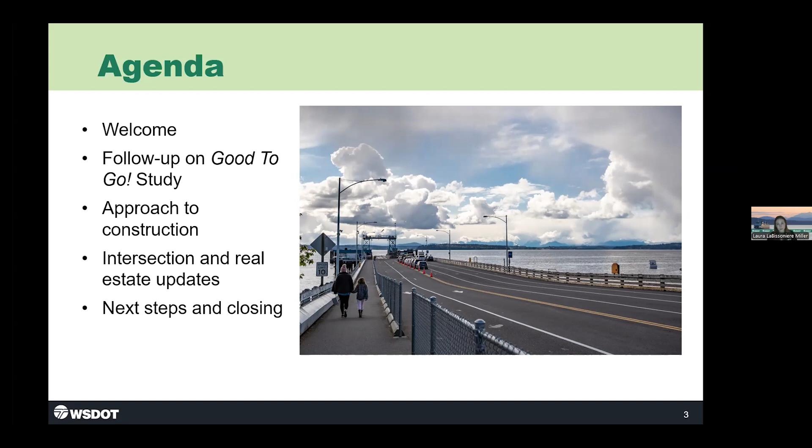I will go ahead and just cover our agenda slide here. So we have just a quick follow-up on the Good to Go study. We're going to spend most of our time today talking about the approach to construction, and then we'll hear some updates on what's going on with the intersection and real estate.

With that, I will turn it back over to Hadley to cover our timeline. Okay, thanks, Laura. So many of you have seen this timeline before, but just as a reminder, we're nearing the end of the PEL Planning and Environmental Linkages study phase of this project that's been going on since 2021.

We're going to be doing the level 3 screening in the next month to screen the range of alternatives that we have. And then we'll be writing the PEL study report and sending that to FHWA for their approval in early 2025. So we're kind of nearing the end of this phase that you've all been working with us on for the last several years, with the goal of narrowing the range of alternatives to a single alternative to carry forward into the NEPA-SEPA review.

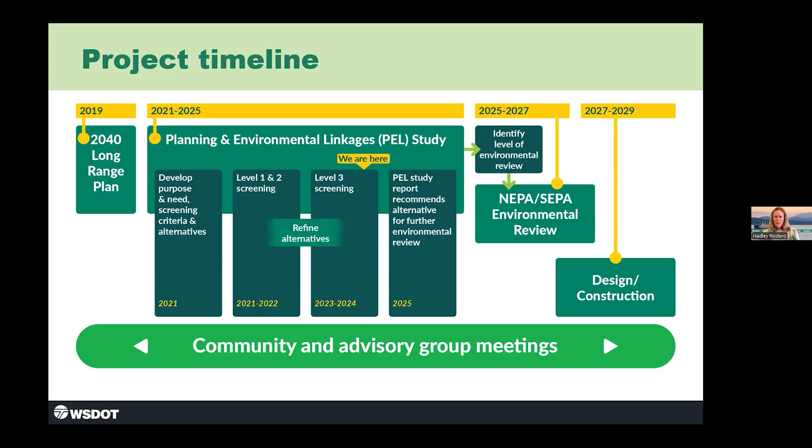So the next slide shows kind of where we've been in this process. We started with a very wide range of alternatives during level 1 screening. Basically everything was on the table, including moving the terminal to a different location outside of West Seattle. Then we narrowed the range further to different dock sizes, till we came up with 2 basic concepts, which was a larger dock or a dock that is similar or the same size as the dock that's there today. All of those concepts hold 186 cars, either a combination of on-dock holding or holding queuing up along Fauntleroy Way Southwest as it does today.

And the 186 cars is important because it's a vessel and a half, which is what our terminal design manual says, to be able to fill a 124 car ferry, which is the size of the ferry that operates this route.

So now we have these alternatives that we're going to do a finer level of screening on with more specific factors to narrow down the alternatives we have to a single alternative to advance.

This shows the topics we've all discussed with both the technical advisory group, all of you, and the community advisory group, which is a group of 24 members of the public and community representing all 3 Triangle Route communities. We're at the point where we've been sharing over the last several months information about some of the key factors that will go into selecting an alternative.

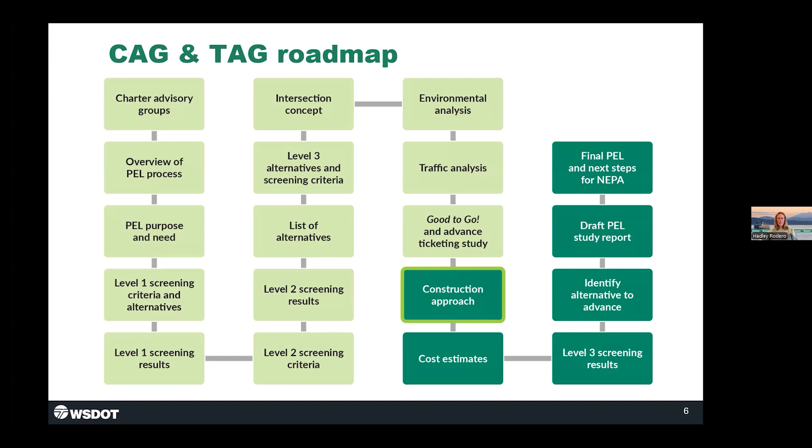And then we'll be moving into drafting the PEL study report and getting input from all of you on that final PEL study before we move into the next phase of design and environmental review. So with that, are there any questions on the process or where we're at with the project? Okay, back to you, Laura.

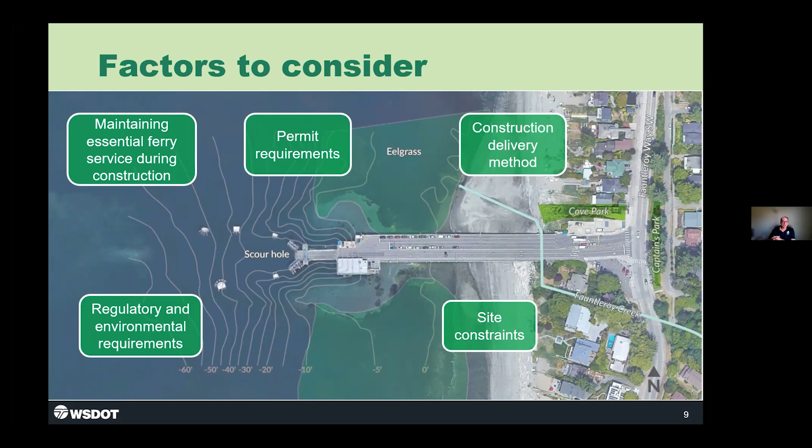We do understand that it's disruptive. Construction is never easy, whether you're remodeling a kitchen or bathroom in your house, or reconstructing a ferry terminal—it is very disruptive. There's a lot that goes on, and we're going to do the best we can to plan and minimize the impacts on the neighbors and all of the ferry riders, so that there are really no surprises. That effort is underway now and will continue through the NEPA-SEPA process.

On the next slide, I want to talk a little bit about the screening criteria we're using to evaluate the alternatives. The next step of this planning process is really to dive into the screening, and our goal is to develop an alternative that we want to take into the NEPA process by the end of the year.

A couple of things I want to highlight here on the criteria: one is the ability to avoid changes to the park and recreation areas. This includes both the Cove Park adjacent to the terminal, as well as Captain's Park, which is across the street from the dock.

We want to be in complete alignment with the project schedule. Each of the alternatives we've proposed involves a very extended multi-year construction season. It definitely is a factor in how we select an alternative. Ed will talk about that in a minute.

Project feasibility pertains to both temporary and permanent right-of-way we'll need to acquire, both onshore and over the water. That's very important for us to consider as we screen these alternatives. And finally, without an adequate amount of budget to build the project, we can't achieve all that we want. So project cost is an important piece for us to screen.

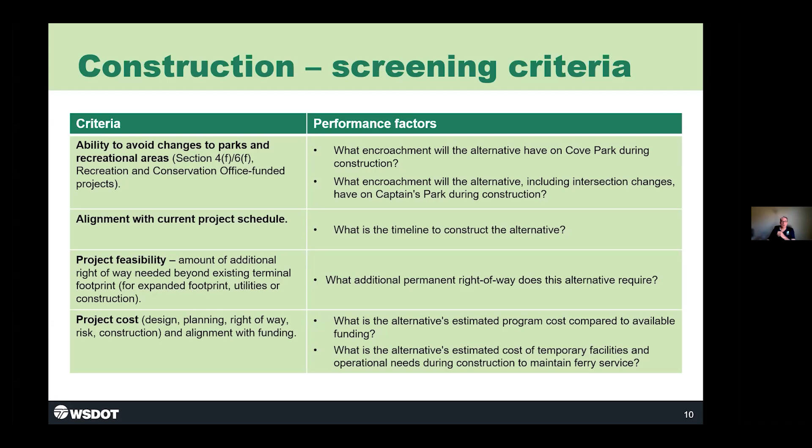We're going to talk about that in our next meeting when we meet with all of you. So let's go to the next slide.

One of the most important things the community's been telling us, and very important to our planning effort, is the level of service we can provide during construction. This is a very tight space in which to work. We have several lanes of holding and several lanes of egress on and off the boat. We don't have a lot of extra space, unlike Coleman Dock, for example, where we have 20 some lanes for holding. We have 4 lanes for holding, and it's very difficult to construct a project when we have such a limited amount of space.

We should plan for some impacts to customers, and that'll be part of this. We'll be communicating that throughout the design and then in construction to make sure folks understand what those impacts will be. That will affect the holding on the dock. It'll affect Fauntleroy Way for sure. So those are some things that we'll talk about here in a minute.

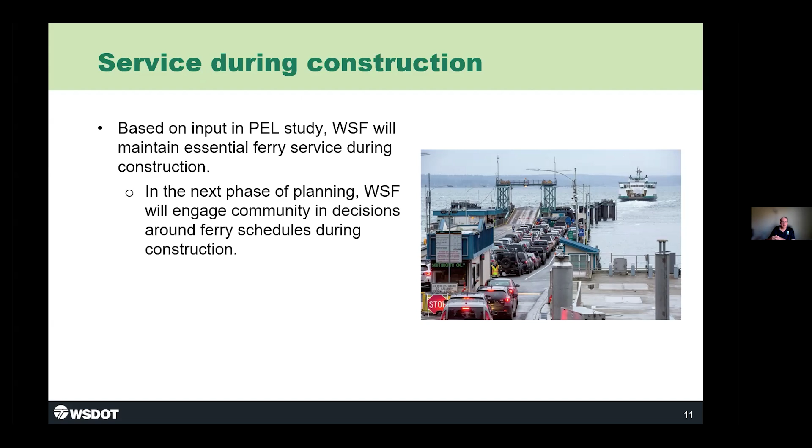With that, I'm going to turn it over to Edd Thomas, who is going to walk you through the sequencing of the various options and how we will actually replace the terminal, regardless of the alternative. There's a variety of ways to do this, but we're going to talk about that next. So Ed, you want to take it away?

Thanks, Dave. As Dave mentioned, as part of this study, we've started thinking about how to phase construction. We've developed a conceptual sequence, and with the next few slides, I'd like to explain each of these phases.

With phase 1, the ferry service operates from the south half of the existing trestle, utilizing the existing slip. That's indicated here in this dark cyan shading, with the construction activity highlighted as an orange hatching.

For the first 18 to 21 months, the contractor will build new toll booths, realign the exit lanes, and then build the north half of the new dock and a new temporary dock with a temporary slip off to the west-northwest off the end of the existing dock.

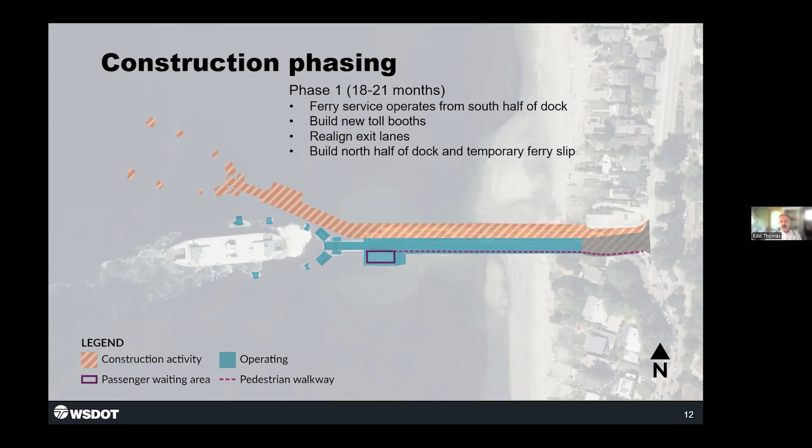I'd also like to note that we're still working on determining a suitable construction staging area for the contractor, as well as a suitable area for construction offices.

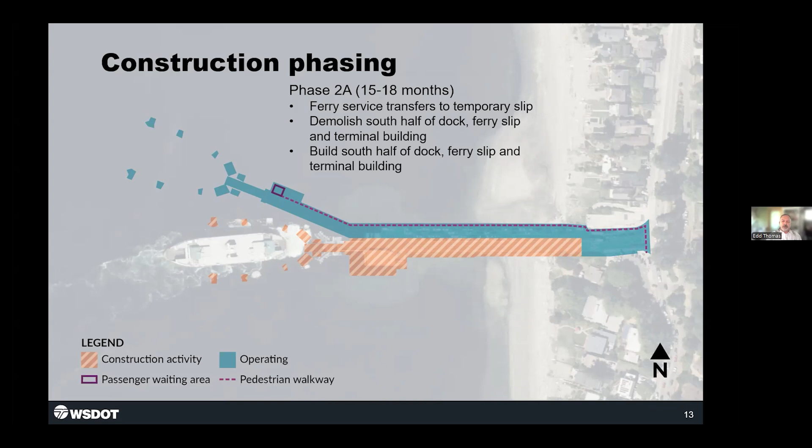Moving on to phase 2A, the ferry service will transfer back up to the north half of the new dock and operate out of the temporary slip. Over the next 15 to 18 months approximately, the contractor will demolish the remaining elements of the existing facility, the south half of the existing dock, the existing terminal building, and the existing slip, and then construct the new south half of dock, new terminal building, and new slip.

Moving on to the next phase, 2B, ferry service transfers back down to the south, operating off of the new south half of the dock and new slip. It'll be approximately about a month for the contractor to reconfigure the north half of the dock from its temporary configuration to its more permanent configuration.

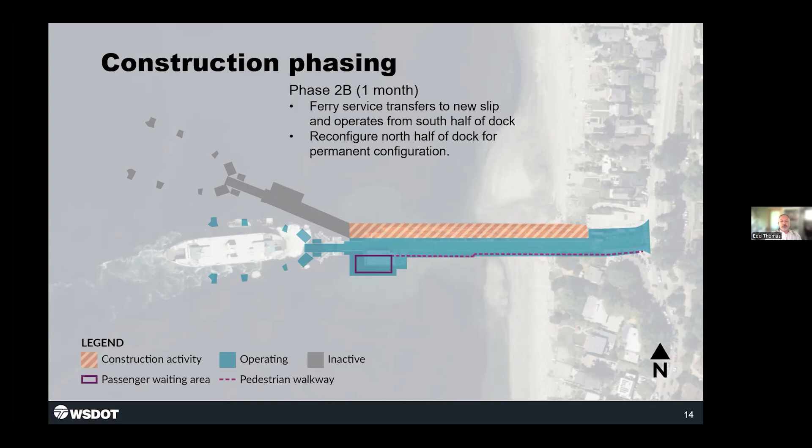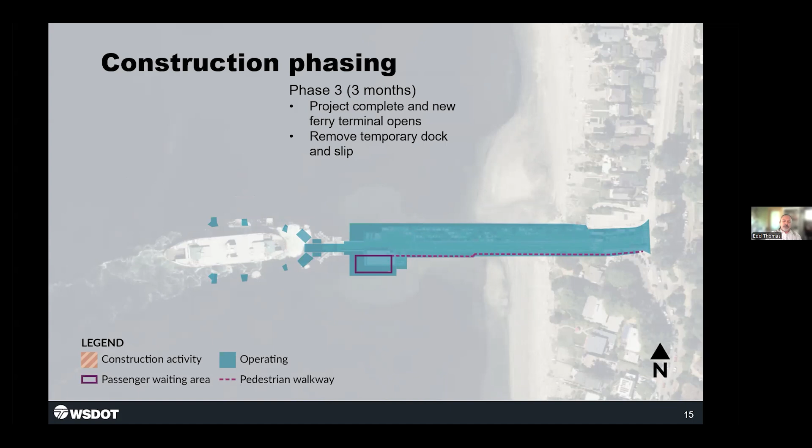Then at the end of 2B, we go into phase 3, in which the project is essentially complete and full service would resume out of the facility. Then over the next approximate 3 months, the contractor will remove all of the temporary dock and slip components.

Then with that, we'd like to open it up for questions about this sequencing. Thanks, Ed. I'll just pause to see if there's any questions about the construction sequence or anything that Dave covered.

This is Penny. I wanted to know if this construction sequence would mean you've chosen your alternative then? Or does this work with any alternative, I guess?

We have not chosen an alternative, and this construction sequencing would essentially apply to any alternative. The slides represent an approximation of the A series alternatives, and the longer alternatives would have a little bit more sequencing involved because of the nature of the longer dock.

Okay, I see Rod, Malcolm, I see you have your hand up as well. Would you like to jump in? Yes, especially since now I know my name is Rod instead of Andrew. I figured out how to change my name.

Two points. The construction sequencing slide was very helpful in assisting me understand the potential overwater coverage of the temporary feature, and that is something that most likely will impact the tribe's treaty right to fish in the area. And a knock-on effect of the temporary slip for the ferries is that the ferry is going to deviate from its existing route for a short distance. So it'd be helpful to the tribe to know close to the Fauntleroy terminal where the new route will be, and the route the ferry will have to take before it gets back onto its traditional route. Thank you. Ed, would you like to address that question?

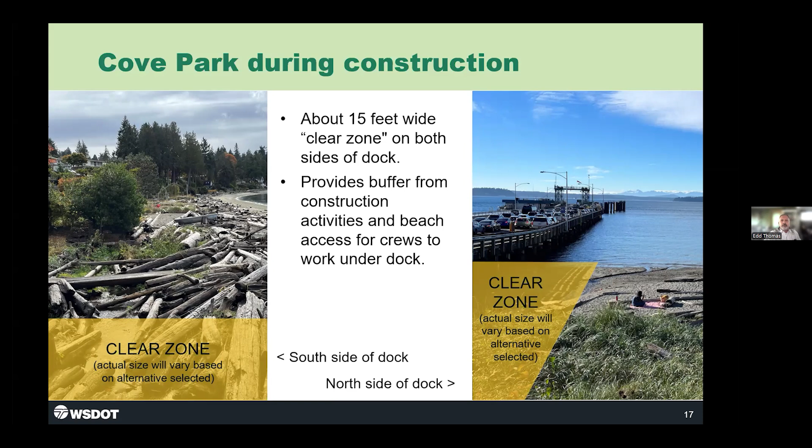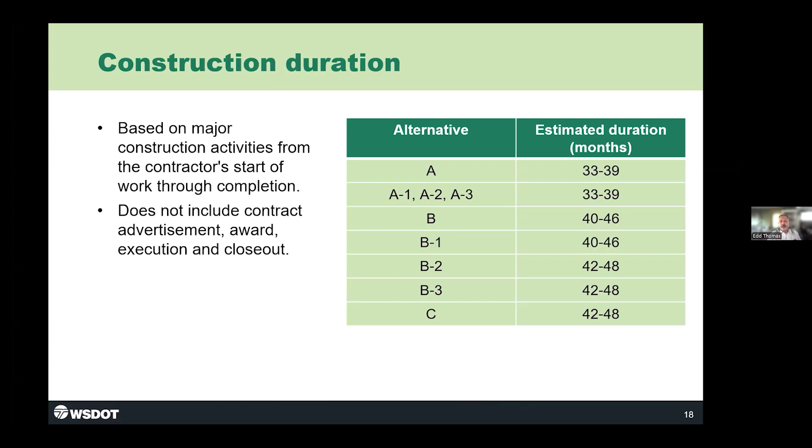These construction durations are based on major construction activities from the contractor's start of actual work through completion. These durations do not include internal construction contract requirements for WSF, including their advertising, award, and execution period, and their internal closeout period. And I think with that, I hand it back to Dave to talk about construction delivery method.

Okay, that's fine. One of the questions we've asked ourselves, which dovetails into the presentation Ed gave on phasing, is the construction delivery method. WSDOT has a long history of embracing alternative delivery methods and has done a lot of design-build projects as well as design-bid-build projects. We're diving into a delivery method called progressive design-build on our fish passage projects, and we recently finished the Coleman Dock project using a process called GCCM, or CMGC depending on where you're from.

So we went through a process to evaluate the delivery method and settled on the most appropriate approach being to use the design build method. There's a number of reasons for that. For those that don't know it, let me explain what design build is.

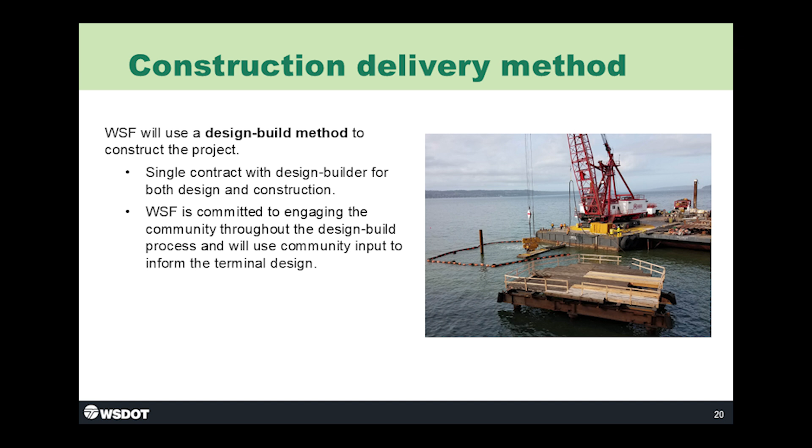Essentially, it means that we have a single contract with a design build team. It involves a contractor, their designer of record, and all of their design and construction subcontractors. Under this single contract, the contracting entity will both do the design as well as the construction of the work.

And the state's role is to develop a request for proposals, a request for qualifications, which includes specifications that the design builders bid on.

One of the reasons that we like design build at the state is it centers around risk allocation. That means allowing the entity best suited to manage risk to be the owner of that risk. On a complex project like this, one advantage of going design build is the design build contractor is responsible for all engineering, all constructability evaluations, all errors and omissions, both in the design and in quantities. It allows the state to provide oversight, but not to own those decisions.

And it puts the entity most capable of the constructability side in charge, to come up with a way to sequence the project. So while Ed's done a great job coming up with this phasing, a design builder who comes on board could look at this in a little different way and may adjust how the dock is managed while it's being constructed. So that's an opportunity for us.

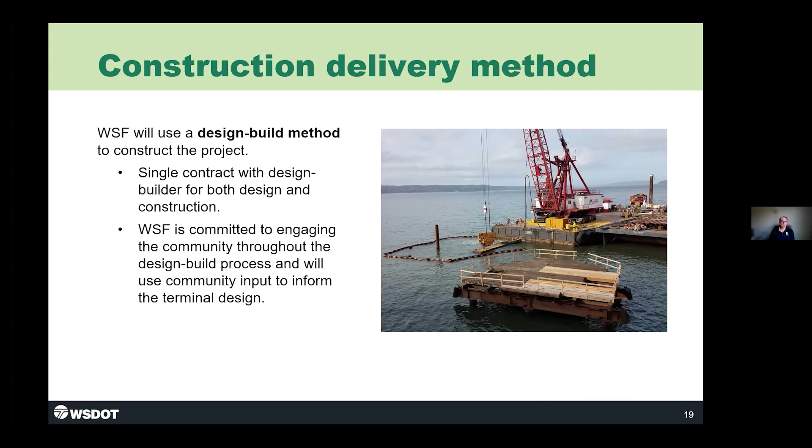We are committed to engaging the community through the design build process. We've done that in all the design build projects the state has been doing for the last 25 years. That applies to both design build and design bid build. We can be prescriptive in our specifications on what sort of aesthetics and context sensitive features we want, based on input from the community and the neighborhood. That's certainly something we do not take lightly, and we'll make sure whatever we propose has an aesthetic that works with the neighborhood.

So that's what I had for this slide. Any questions on the design build decision? Okay, I'm not seeing a show of hands.

I see Penny's hand is up. My hand is up. Oh, okay. And Charlie, I don't know if you were going to say something, because we started to speak at the same time. No. Okay, go ahead, Penny. I have several questions, but if someone else raises their hand, let me know. I'll lower mine since you can't see it anyway. Probably all the fun technical difficulties coming up. Maybe it's because I changed my name. And you really need me to be Andrew.

I was wondering about the several questions. So for the design build, how does that really affect your assessment of things like the duration, where you don't have the contractor on board yet? Does that make sense? Yeah, sure.

There's some, Penny, and I'll speak to your background and what you represent here. Certainly there are going to be things we need to be prescriptive on, whether it's the type of material used or the number of piling allowed to be installed in the water for the temporary structures, the duration of the project. Edd Thomas and his team will be doing some preliminary engineering to frame and provide some bookends to what the work will require. And then we will be prescriptive in the design build contract: thou shalt finish the project in, say, 4 years, 48 months.

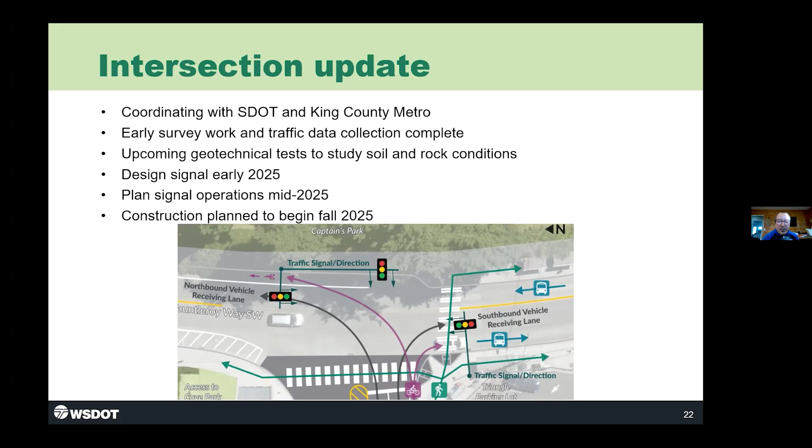That covers the bulk of the signal design. Then in mid-2025 we'll plan signal operations. The start of construction, again, is fall of 2025.

That's my update, Laura. Any final questions about the intersection, real estate, or anything else covered during the meeting today? Again, thank you for taking time out of your busy day to be here. I think with that, we can go ahead and show our next steps.

We're hoping to schedule one more TAG meeting hopefully this year. As Heather mentioned at the beginning, we'd like to share an update on where we're at with the cost estimates and then move into the level 3 screening results, before we complete the level 3 screening process and the PEL study report into early next year.